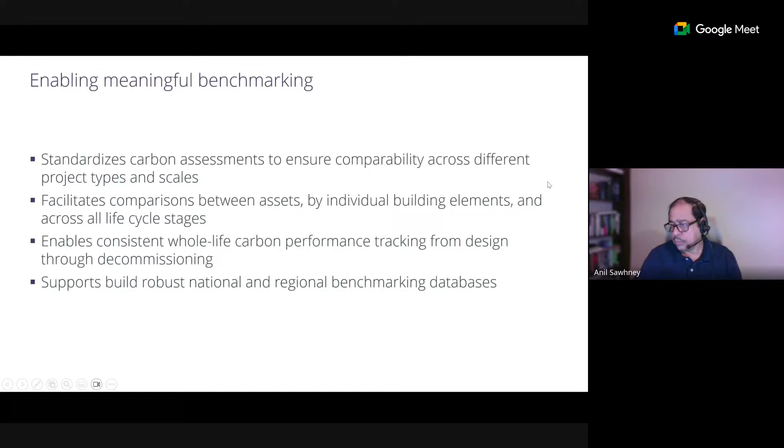So once you have your WLCA database in place, for example, you can utilize it to establish design baselines. So early in the process, you can guide your clients, you can guide the decision makers in seeing the kind of carbon emissions without having too much data or detailed design available for your project. So it helps promote iterative carbon assessment that informs each project phase from concept to delivery and up to end of life.

Supporting carbon targets and policies. So if you're using WLCA, it enables reliable carbon target setting across upfront, embodied, and operational carbon categories. So regulatory bodies, planning folks, and others, voluntary sustainability schemes, can use it to set those targets and implement those policies. So if you are in Vancouver, for example, they have set their own targets. If you're in Toronto, there are targets set. In many other places in Europe also, targets are being set. If you're an office building, you're given a limit or a target for emissions from your projects and assets. Without doing WLCA, it is really not possible to undertake these kinds of targets, policies, and limits.

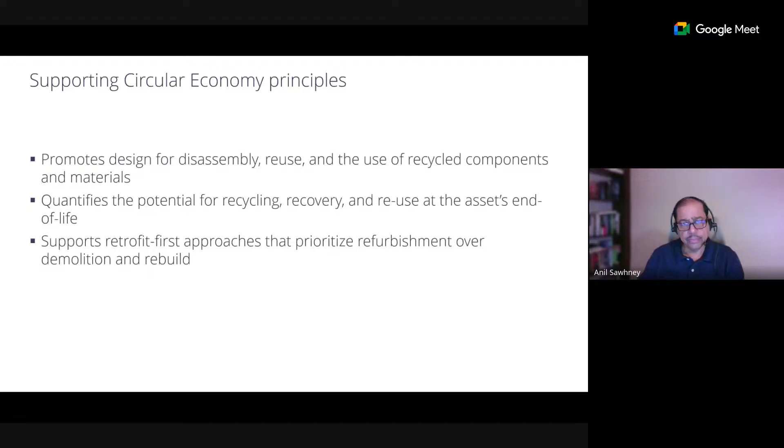So those are the benefits of using whole life carbon assessment. As I mentioned, through the use of WLCA, you can improve and enhance your emissions reporting across the GHG Protocol's 3 scopes. So the greenhouse gas (GHG) Protocol, you can go to their website and review all this, categorizes emissions into 3 scopes or categories. First is scope 1, which is the direct emissions from owned or controlled sources.

So assume you are the reporting entity. Let's say VNIT is submitting a GHG Protocol report on emissions. Any emissions that come directly from their owned or controlled sources are called scope 1. Scope 2 emissions are indirect emissions from purchased energy, purchased water for your assets. Scope 3 is all other indirect emissions from the value chain. And scope 3 is probably the most important, but the most difficult and complex to calculate, but it applies the most to the construction sector.

So these scopes help organizations identify, manage, and reduce emissions across their operations and supply chain. So if you're the reporting entity, it helps you do that. Most organizations and most requirements currently ask you to report scope 1 and scope 2. They realize that reporting scope 3 is difficult. So scope 3 emissions are generally not calculated and reported, but it should change. It will change if you're doing WLCAs, and I'll share with you perhaps tomorrow or the day after how, after doing a WLCA for your building, you can then categorize scope 1, scope 2, scope 3 emissions.

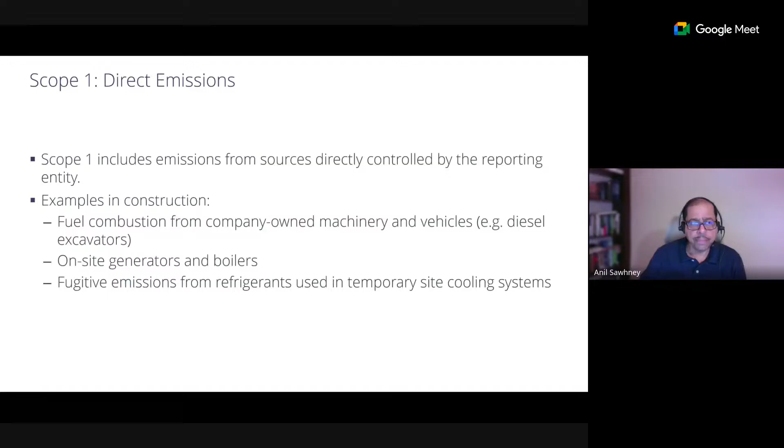Scope 2 indirect emissions are essentially emissions that come from purchased electricity, steam, heating, or cooling for your assets. So your company maybe buys energy from an external provider; the emissions related to that purchase are categorized as scope 2 indirect emissions. So if you are a construction company, for example, then all the electricity used in site offices and whatever else you have on site contributes to scope 2. So all emissions coming from temporary construction equipment are also scope 2 emissions.

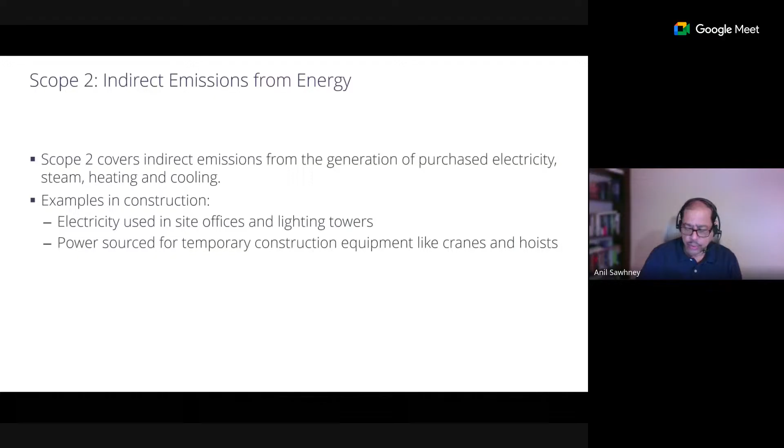Scope 3 are all other indirect emissions. So scope 3 is difficult to calculate because it's all other indirect emissions occurring in the value chain. Examples in construction would be embodied carbon in purchased materials like concrete, steel, timber, transportation of materials and workers to the site, waste disposal from construction sites, any business travel, any emissions from the use and maintenance of built assets related to your value chain all come under scope 3. So if you are looking at a construction project, a significant portion of the emissions that you calculate using WLCA would be categorized as scope 3 emissions.

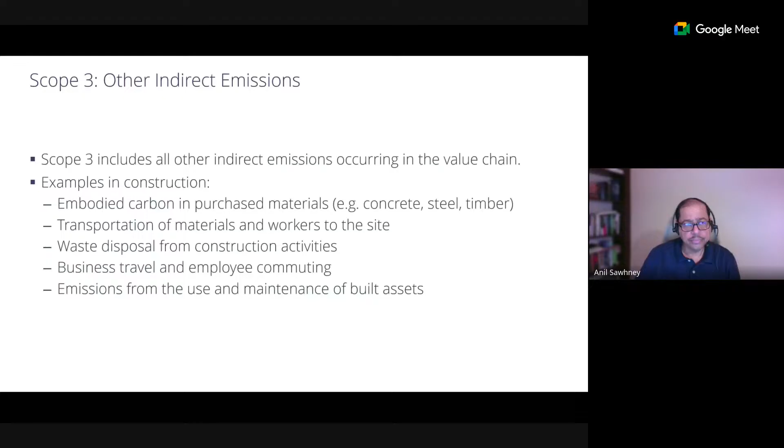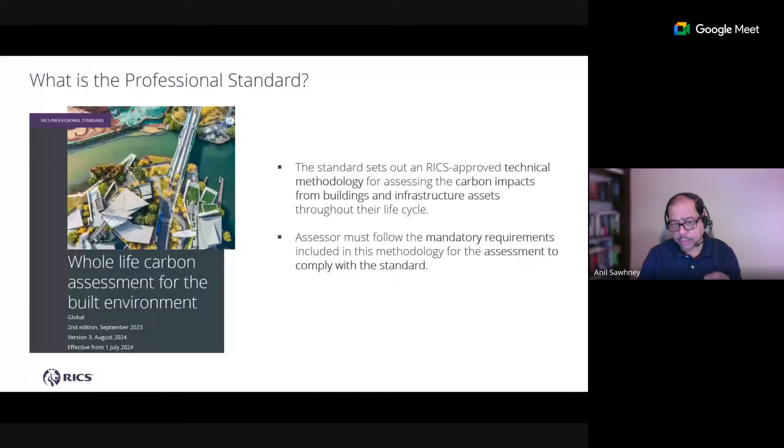So as I mentioned, 2017, we released the first edition of the standard. At that time, it was applicable only in the UK. It was regulated and used in the UK. But nevertheless, folks globally have been using our standard for a long time. Then about 3 years ago, a decision was made to release the second edition. You will notice the second edition has gone global. So from the first edition, which was UK based, it is now a globally applicable standard. It now includes methodology to calculate emissions from all types of projects: infrastructure projects, housing projects, small residential projects, to retrofits.

Okay, it is connected to another standard called ICMS, which we are going to discuss today, so that the standard can not only calculate carbon emissions, but it can also connect to cost, because most decisions about reducing carbon emissions should be made in a cost-effective fashion. So in order to do that, we need to connect cost and carbon together, and an assessor can calculate not only the carbon emissions, but is also able to calculate the cost associated with that design.

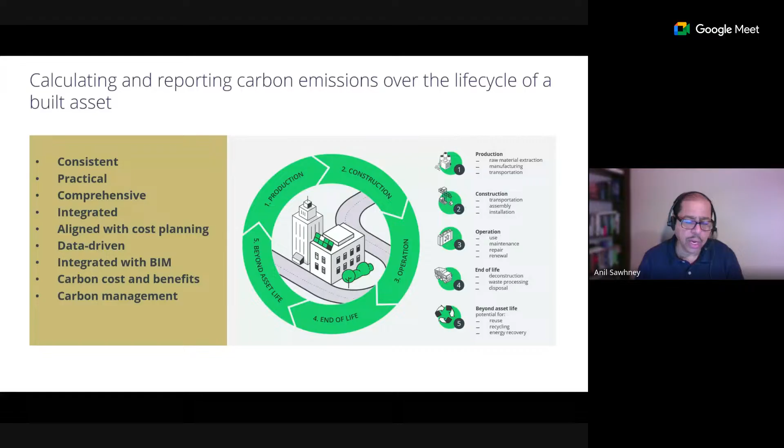It's aligned with cost planning, and that's done through ICMS, which I will try to explain as well today. So the methodology is data-driven. It's integrated with building information modeling, or BIM. It considers both carbon costs and benefits, and is also linked to carbon management.

So here are the key design principles. The WLCA standard that we have produced is consistent. So it is based on a methodology. It clearly tells you how to make assumptions and which data to use, at which life cycle stage, what data you should be using. So it's again a best practice guidance which is consistent.

It's practical. So unlike ISO and EN standards, which are basically high-level principles and mandatory requirements, our standard also provides best practice. It also provides heuristics or rules of thumb to make assumptions, to make calculations when you have limited data. It's comprehensive. We cover all modules, all system boundaries, product and project life cycles. The standard can easily connect to the core workflows of design, construction, post-construction workflows, and can work very well with regional and national benchmarks.

It's aligned to cost planning. So through the connection of this standard to this other standard called ICMS and to our own RICS standard called New Rules of Measurement or NRM, the assessments can be combined with cost planning also. It's data driven, so we guide you at every stage, every calculation, what kind of data source would work best for that stage. It's integrated with BIM, so you can use digital workflows for your calculations also. Carbon costs and benefits, this is very crucial.

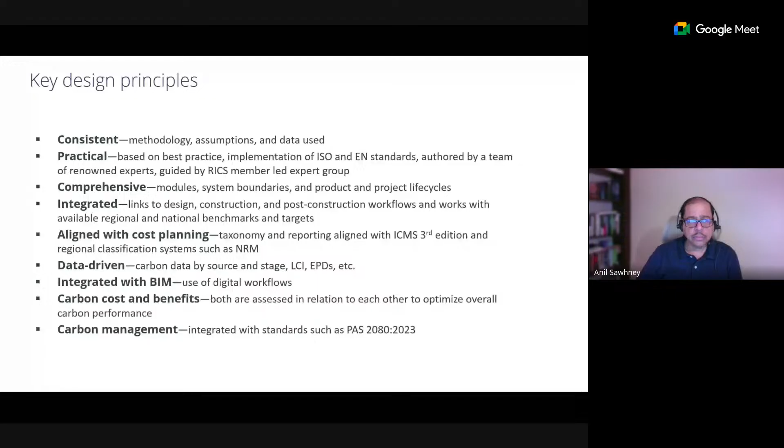You can also download the building element categories across which you need to report emissions. So it will be a simple table that shows you substructure, structure, services, and so on. So that elemental breakdown of categories is also available. So lots and lots of resources are available for free, which you can download and use.

So since its launch, about 30,000 downloads of our standard, which is a pretty big number. And then lots of other awards and finalists. So we have won the Engineering Matters Award in 2024. And we were also finalist in some other awards for this standard. So it's a well recognized, quite heavily used standard that our members are required to use.

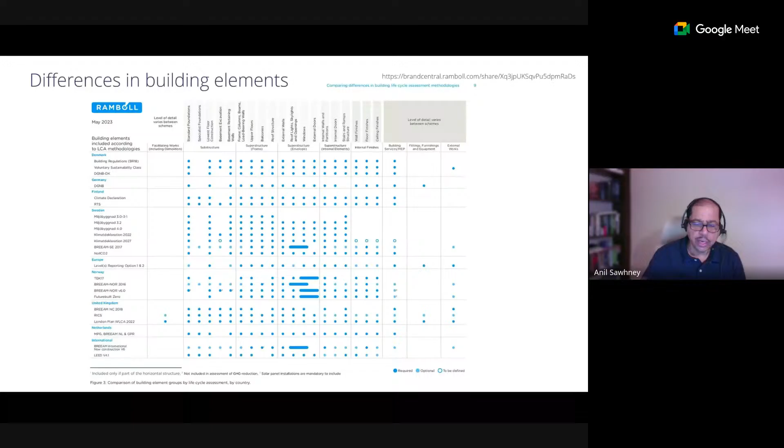There's another big debate actually going on right now. This report from Ramboll is May 2023. Our standard's second edition was released September 2023, so it doesn't fully address our second edition. Another finding from this Ramboll report was that, fine, we've done an excellent job calculating the total carbon emissions from our building.

In order to report, we need to say tons of carbon dioxide equivalent per square meter of your building. But the way the denominator is calculated can vary. As you know, in India, we have super area, carpet area, and so on. So that definition itself is problematic and reduces the consistency that we are looking for in doing whole life carbon assessments, putting them into a benchmarking database and utilizing them for various purposes, not only showcasing the better performing assets, but also utilizing that historical information to guide your new buildings in the early stages when not much project information is available. So it's another problem that must be addressed.

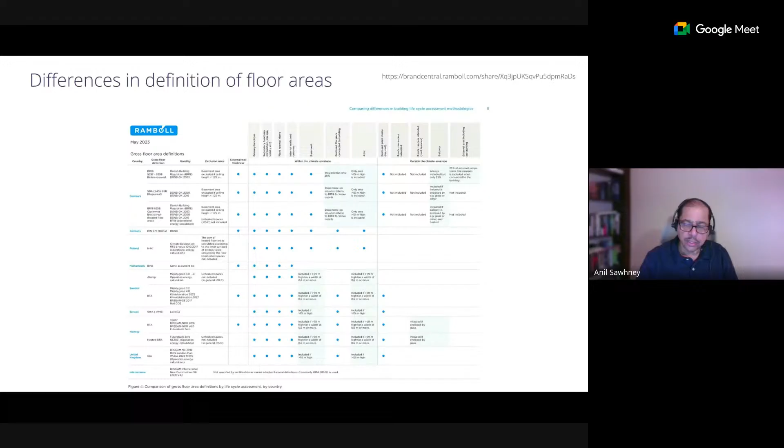So Ramboll did a study. They took a building in Sweden and in Denmark. They did the WLCA calculations, only certain portions. In Sweden, you can see that because we don't include all modules, the benchmark we got was 166 kilograms of carbon dioxide per square meter compared to 423 for the same building in Denmark.

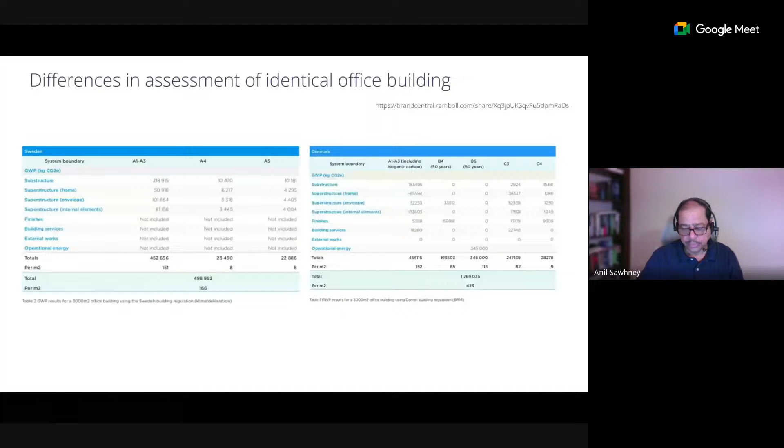So I'm going to pause here again and see if anyone has any questions. Anyone online? Anyone in the classroom? Okay.

Now let's dive deep into the actual calculation. I'm going to follow the RICS WLCA methodology, but I think you will see other standards have a very similar approach. The modular structure we are going to follow for computations is the expanded RICS modular structure, which is adapted primarily from EN 15978, in which we broadly have our upfront embodied carbon, in-use embodied carbon, and end-of-life embodied carbon.

We have upfront biogenic carbon, reported under Module B, Module C, and Module D. Obviously, we have operational carbon, B6 and B7, which is energy use and water use, and then your user carbon, which is here. So let's begin with Module A and how we go about calculating emissions under each module for either a building or an infrastructure project.

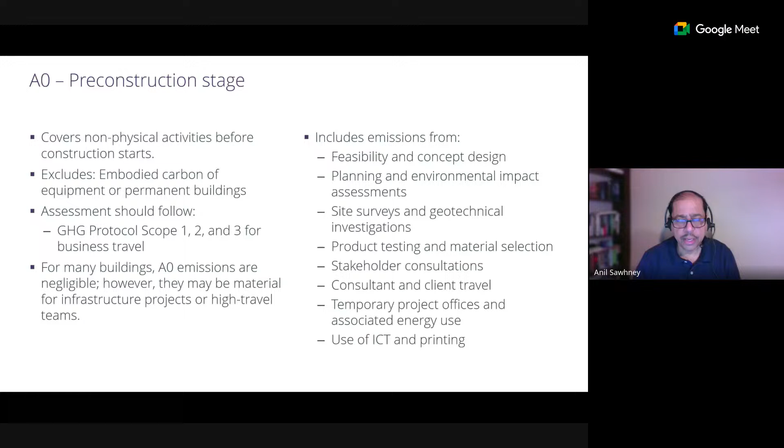Maybe you have soil investigation that requires heavy diesel-operated equipment, emissions from that, all your site meetings, team meetings, and all other aspects of emissions during the pre-construction acquisition stage. Generally for infrastructure projects, these are included in the A0 submodule of Module A.

The next calculation is done for A1, which is raw material supply. A1 applies to both buildings and infrastructure. Here you're calculating GHG emissions from the extraction and processing of raw materials used in a construction product, a construction system, and construction assembly. So it's very crucial that we consider these product stage raw material supply related emissions.

So it includes emissions from mining, harvesting, processing of raw or recycled material, and any emissions coming from transport within the extraction site, not leaving the extraction site. So let's say you're doing extraction or processing of aggregate. All movement within that aggregate plant or quarry will be included in A1. Energy and water used in raw material extraction is also part of this.

So it applies to all types of construction, all materials, all products, including MEP systems. And it's also for both primary and secondary material sources. So maybe you have recycled steel, doesn't matter. Whatever is used in the processing of that also is included under A1.

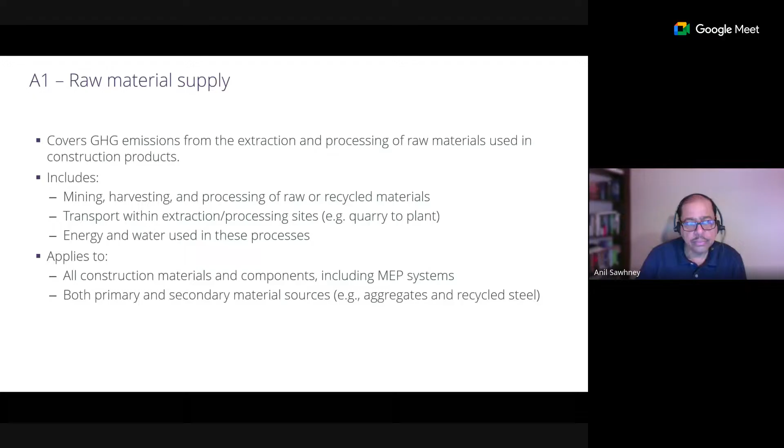So for A1 raw material supply emissions, imagine you're buying a cubic meter of concrete. You don't want to go and use first principles and calculate emissions coming from extraction of raw materials for your cement, then aggregate, sand, water, its mixing. If you started doing that from first principles, it would become very difficult to do assessments.

So we rely on published documents, which are called environmental product declarations, or EPDs. I'm sure all of you are familiar with this. The sector is relying on EPDs from which we read out our emissions. So there would generally be an EPD for cement, and then there may be an EPD for ready-mix concrete. You can use the appropriate material product and find out A1 from there, literally a monogram from where you can extract the carbon emission factor.

For material products where EPDs are not available, you may have to go down to first principles, do an LCA, and calculate emissions that way. You must avoid double counting with modules A2 and A3, because A2 is transport, but that transport is outside of the processing plant over to the manufacturing plant, whereas all transport related emissions within the extraction plant are included in A1.

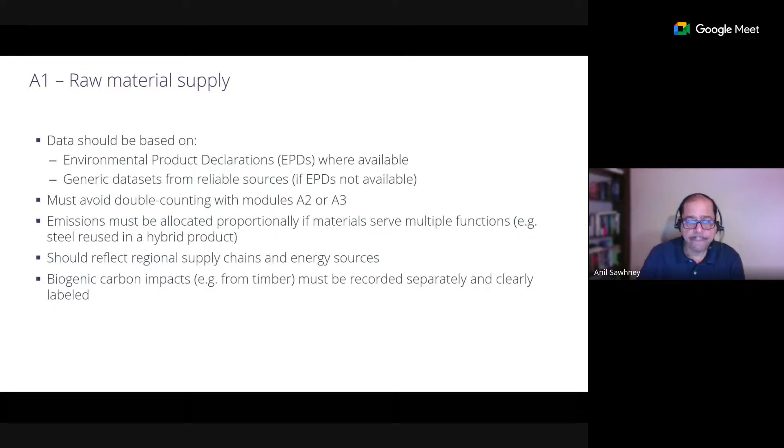The next sub-module within module A is for transport. This accounts for transport of raw materials and recycled materials to the product manufacturing facilities. So you've extracted some material that you need to use to create a construction product. The transport related emissions are all included in A2. This includes emissions from vehicles such as road, rail, sea, inland waterways, loading, unloading, and intermediate storage if needed.

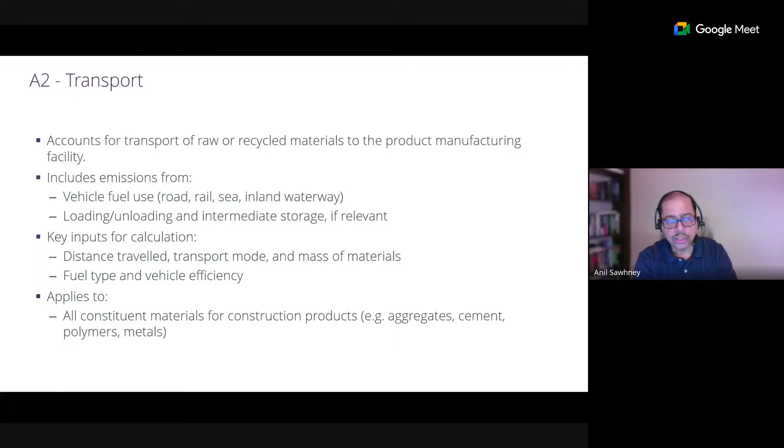Okay, so this A2 transport is sometimes also called internal transport or production related transport, versus another transport module we're going to see which relates to bringing these products, materials, components to the construction site. So more on that later, but A2 transport covers all your transportation related emissions from the extraction site over to your manufacturing plant.

So A2 transport assumptions should reflect actual supply chains or use reliable average data. It must be separated from A1. So A1 and A3 are separate; transport in between is calculated separately. If you're using multimodal transport, you need to account for each one separately. So if something comes by ship and then is transported by trucks, you need to account for those separately.

There are third-party databases. There is, as I shared yesterday, the Global Logistics Emissions Council, which releases carbon factors. So they'll tell you, and you use those to do your calculations. The UK government publishes GHG conversion factors. Most national statistics offices and government agencies are responsible for providing this kind of data, the carbon factors, which is also called secondary data or background data.

Remember, when you're doing an assessment, you will need two types of data. One directly related to your asset or project, meaning quantity of concrete, quantity of steel. This is called primary or foreground data. And then you need conversion factors, emission factors, EPDs. Those are called secondary or background data. So combining those two is how you calculate the emissions for your buildings. So A2 is related to transport.

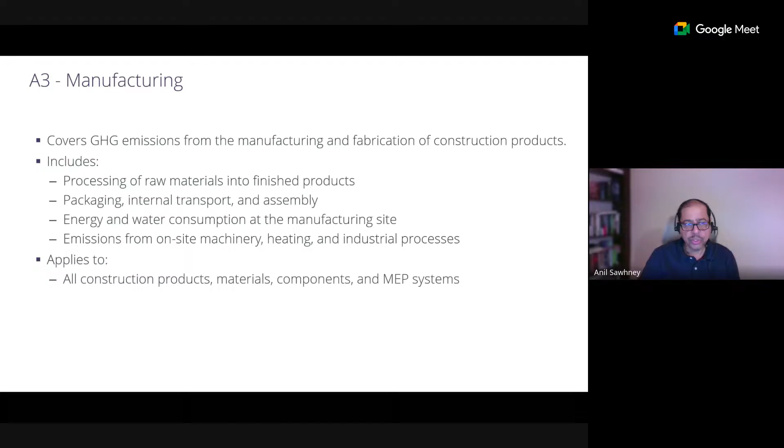So A3 manufacturing, generally, again, you're not going to go calculate fuel used, energy used, water used in the manufacturing plant to create the product that you're going to be using. Generally, we are going to rely on EPDs or environmental product declarations. So as you can see, EPDs are central to whole life carbon assessment.

We are going to spend time perhaps tomorrow separately talking about EPDs, their availability, their format, how to read them. I guess I'll give an example today also on how to read an EPD. Many of you would already be very familiar with it, but just to level set, we will look at that also today. So A3 is manufacturing, product stage done, pre-construction stage done.

Then we are now moving into the construction stage, where A4 transport emissions are basically all your emissions related to bringing stuff to the construction site. So it applies to new builds. It also applies to any maintenance repair work that you will do in module B. Okay, so A4 transport is now bringing construction products and materials from your manufacturing or storage facility to the construction site.

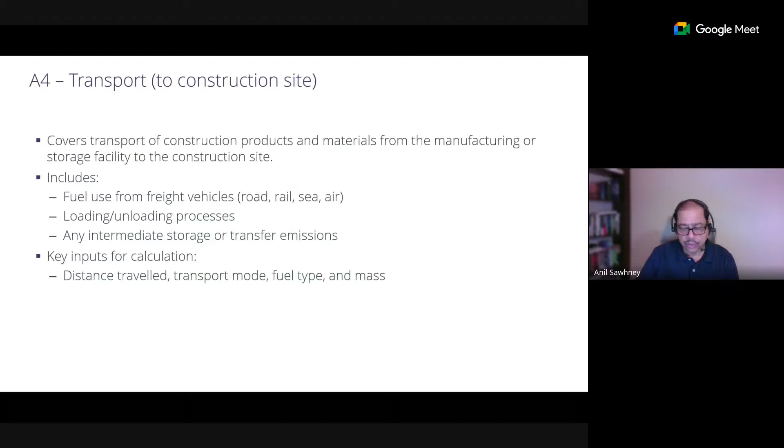Obviously, key inputs for calculations are distance traveled, mode of transport, is it a truck, the fuel type used, the tonnage or the mass of the material and the vehicle itself. So A4, transport to the construction site, again applies to all products, materials, temporary works, and MEP systems delivered to site.

You should use project-specific logistics data. So if ready-mix concrete trucks travel 17 kilometers to reach your site, you should use that in calculations. But as I said previously, we generally tend to make assumptions. We use EPDs that have built-in distance factors. So we don't go into very accurate calculations because remember, A4 is a tiny portion of the overall life cycle emissions that are going to come from our projects.

Emissions, make sure you do separate calculations for half laden, full laden, empty return trips. All that should be calculated. We'll see how that is done. But I think generally, again, you do not go into that much level of detail if it doesn't warrant it. So emissions from worker travel, though, are not included here. They are part of module A5 and scope 3, if relevant. Okay.

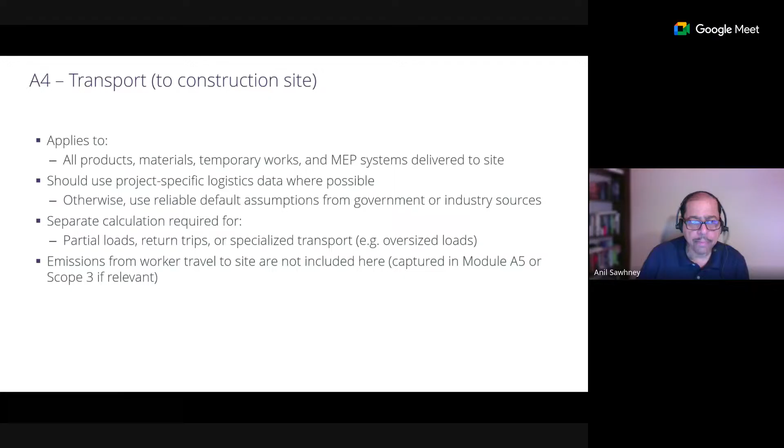So a quick example, this is adapted from the US. So I did a little bit of conversion. So you will see a bit of a problem in terms of units, but let's hope it all makes sense. So you're maybe working on a residential project in which you have a slab on grade with concrete, a particular grade of concrete. The total quantity needed based on the thickness of the slab comes out to about 56 cubic meters.

In the US, we have cubic yards, so converting truck capacity, let's assume each ready-mix truck, transit truck, will have 8 cubic meter capacity. So you need 7 trips to bring this ready-mix concrete to site. Let's assume, again hypothetically, the concrete plant to construction site is 24 kilometers one way. The fuel consumption factor you can get from the vehicle's published data. So let's assume 1.3 is that fuel consumption factor.

Each trip is 2 times 24 kilometers, so about 37.85 liters of diesel is consumed in each trip. Since there are 7 trips, you have 260 liters. Now you need to go and find out, when that ready-mix truck is running, either for every kilometer it runs what are the emissions, or for every liter or gallon of diesel that's burned, what is that carbon factor. In the US, EPA publishes this. In the UK, the Statistics Office publishes this.

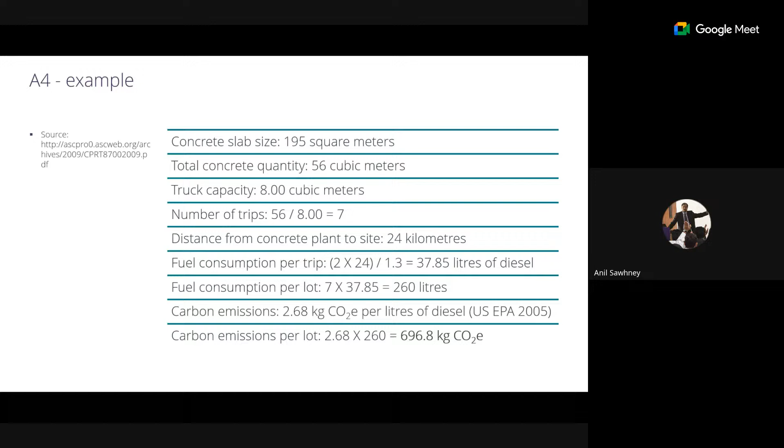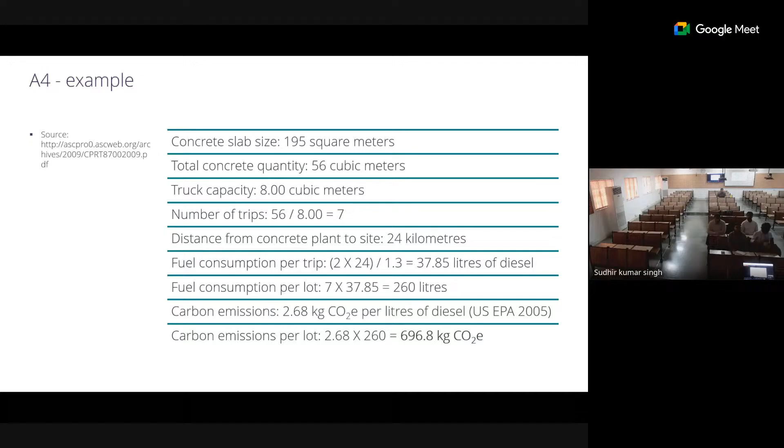Yes, sir. Okay, I guess we can start. Yes, sir. Okay, excellent. So welcome back. We're going to continue with this. There are a few slides more to cover before I jump into sessions 7 and 8, which are sort of combined, but there may be room for some questions and comments from you, as well as perhaps some additional examples.

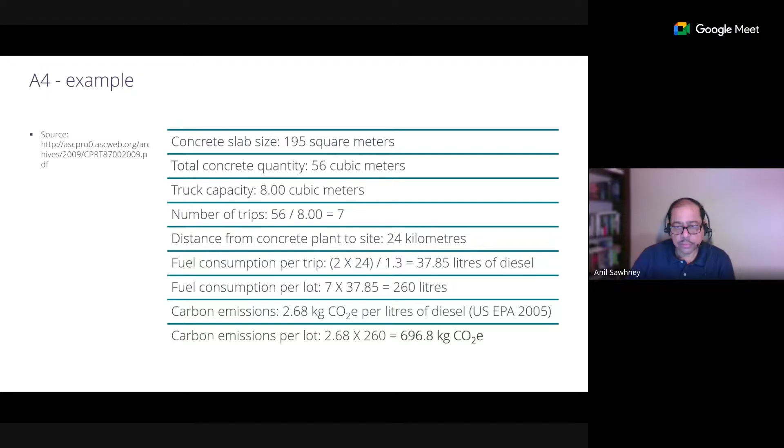So moving ahead after this example, the last module, perhaps the most important module even though it has a small contribution, is A5, the construction and installation process. The RICS standard breaks A5 into 4 separate submodules so that the calculations become easier and easy to understand. A5.1 is all emissions related to any demolition on the construction site. Any demolition or deconstruction of existing building structures or parts of them, including transport and waste processing, should go under A5.1.

A5.2 is construction activities, everything and anything to do with actual construction. So your concrete pumping, excavators, perhaps forklifts, or any other construction-related activities would be found under A5.2. Then you have A5.3, which is waste and waste management. Production, transportation, storage, end-of-life treatment, and disposal of any material waste on site is included under A5.3. So 5.1, 5.2, 5.3 should be calculated.

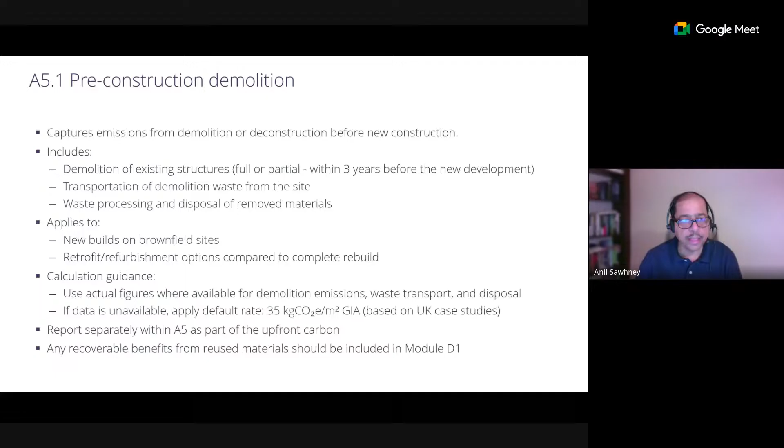A5.2 relates to construction activities, so it covers all on-site construction installation processes. It's all your site prep, site setup, mobilization, groundwork, your temporary facilities or utilities, on-site storage, transportation, temporary works, assembly of products, materials, lifting of stuff, pouring of concrete, compacting. All those construction means and methods should be accounted for in A5.2. All energy and water use for site offices, heating, cooling, lighting should also be included in A5.2.

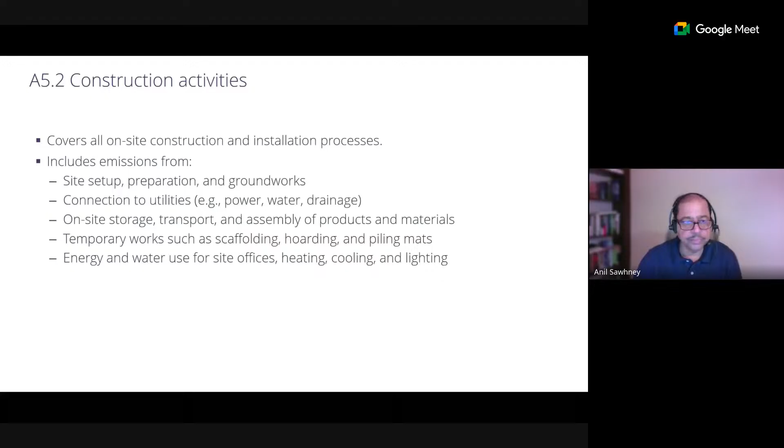So obviously, if you are going to go to a level of detail and doing these calculations, let's say you have scaffolding, or formwork, you have tower cranes, you are going to only utilize emissions from those temporary equipments that are used for your project, because there's going to be reuse also. So make sure that that is accounted for.

Once again, if you don't want to calculate from these first principles, every construction means and method, because there is so much data available on assessments in the UK, rule of thumb says you can add 40 kilograms of carbon dioxide equivalent per square meter of your gross internal area if this is a building, unless more accurate project data is available. So again, you can make these simpler calculations if you want to for your project or for your asset, for your assessment.

So encourage contractors to identify and mitigate 80% of anticipated site emissions before work begins. So for example, switching from diesel to electric or hydrogen powered equipment. And it's happening. So like in the US, contractors are trying to move away from diesel operated construction equipment, moving to electric perhaps, and therefore already reducing the site emissions.

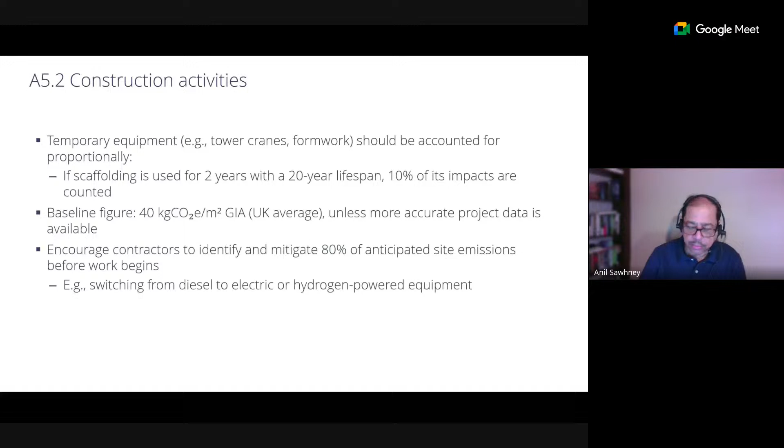So A5.3 is to do with waste and waste management. So it captures emissions from site-generated waste during the construction process. Remember, A5 is construction and installation process-related emission only. So any wasted construction material, which is actually a pretty bad thing, we shouldn't be wasting construction material. The material that came in didn't get installed, emissions related to that.

So that waste: transport of waste offsite, waste treatment, recycling or disposal, packaging waste, default 32% of site waste mass if no data is available. So again, you can utilize some thumb rules for packaging waste, for example. Key considerations: only include materials not installed in the asset. Construction and installation emissions for wasted items should be considered as zero because you just sort of brought them and moved them out of site.

Manufacturing waste from off-site construction. So let's say you're using modular construction, which is maybe factory-built components, maybe wall panels, your trusses, maybe bathroom pods. The waste that occurs in the factory should be part of A1, A2, A3. That is still considered the product stage, not the construction stage. So minor clarification there. So if your construction project is going to use extensively modern methods of construction, such as prefabricated panels, all manufacturing waste will go into A1, A2, A3, and not A5.3, this particular submodule within module A.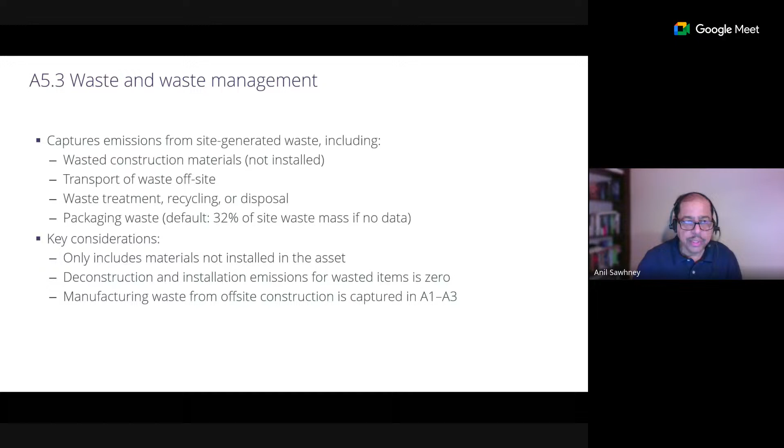So again, there are various ways of calculating this. Our standard tries to give you as much information as possible for waste and waste management related emissions. Broadly, A5.3 related emissions are calculated by a waste rate. I think most cost consultants, folks who know how to do quantity takeoff, would have these waste factors. So let's say ceiling plaster, interior wall plaster, when you pour concrete, when you do woodwork, there is always some percentage of wastage, and it's generally known to experts who work in this field.

And then A5.3 emissions are equal to the product of the waste rate multiplied by what's called the site waste treatment emission factor, or EF. So the RICS standard gives the waste rates. There's a whole table that, for example, says for in situ concrete, there will be 5% waste. For brickwork, assume 6% waste. This is obviously more UK-centric right now, but as we have more and more data, these can be global or regional numbers also. So if you don't have site-specific data, use the tables. Otherwise, you can use site-specific data also.

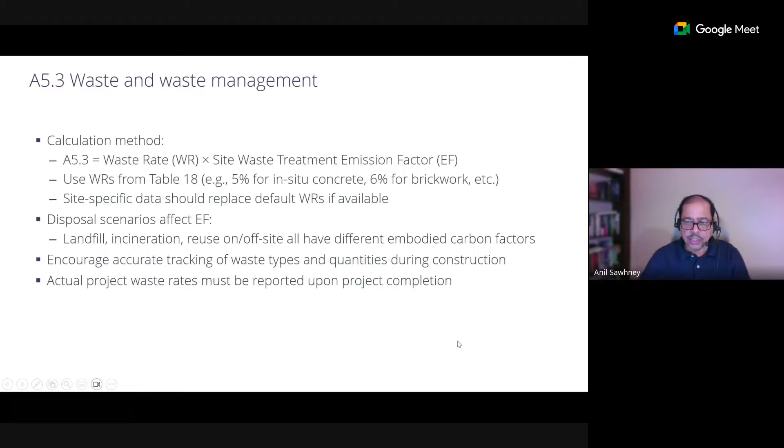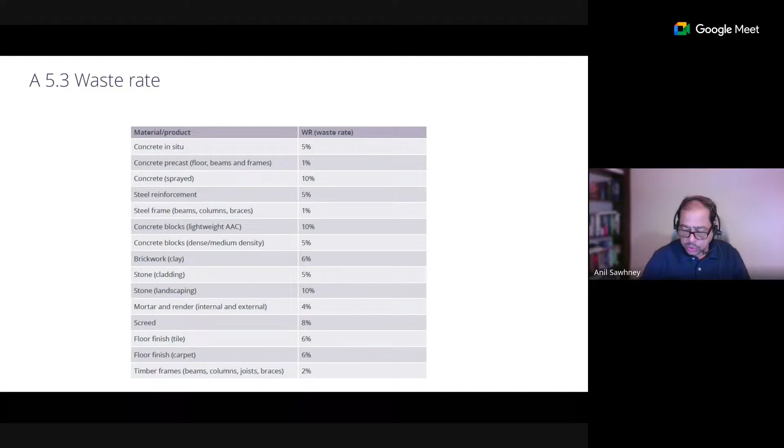So if you look at the standard, you will see WR provided. It's a much longer table. I've just given you a brief snapshot of what typically is considered as a waste rate for your project. And then once you have this information, you can do the EF, which is the site waste disposal carbon factor.

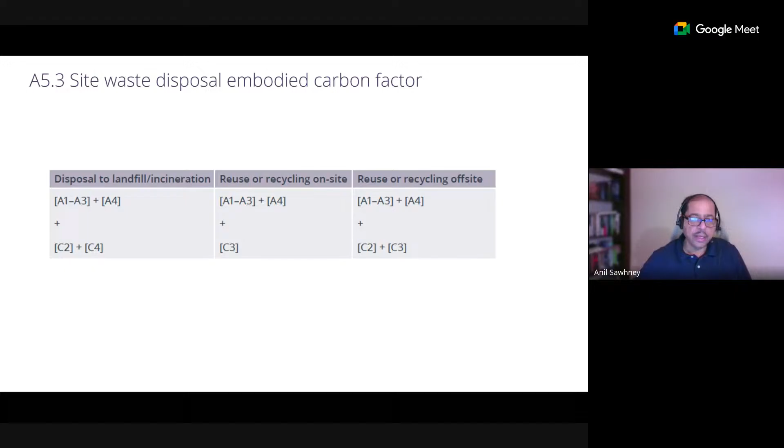If the waste that you have is going to go to disposal, let's say to a landfill, or is going to be burnt, then your waste factor is determined from A1, A2, A3, plus A4, and then the C module, which we have not yet discussed, C2 for transport, C4 for disposal into landfill. So depending on how you are going to be using the waste, the emission factor changes. If this is going to be reused or recycled on site, obviously then there is no transport. So you have A1 to A3, A4, and C3. If it's going to be reused or recycled on another project, you will have C2, which is end of life transport emission. So that's how this is structured, and you then calculate A5.3.

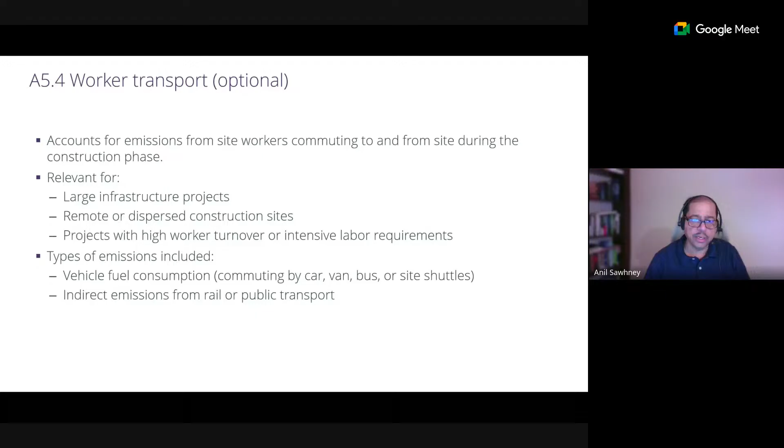A5.4 worker transport is generally optional, but let's say you have a huge infrastructure project in which workers have to commute a significant distance, especially if the contractor provides transportation, then you should calculate worker transport also. So it accounts for emissions from site workers commuting to and from site during the construction phase. It's relevant for large infrastructure projects, remote or dispersed construction sites, and those specific situations where you have emissions related specifically to construction worker transport. I haven't come across large projects where this is calculated and reported, so that's why it's considered optional.

Again, you can use approximations: daily commute rates, number of workers, multiplied by vehicle type. Most governments publish emissions per kilometer travelled for various vehicle types. So use those to come up with emission calculations for A5.4. So generally it is excluded, it's considered negligible, and it's optional if it's a building site in a city center. You do not provide transport for your workers. They may be commuting on their own, so that's omitted, not included.

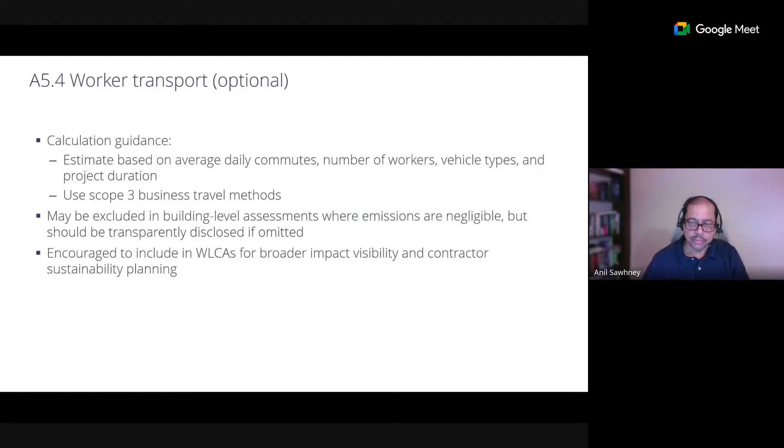So maybe before we jump, this basically concludes the calculation workflows and guidance, mandatory requirements from the RICS standard. You will see similar workflow calculations even in EN 15978 or any other global standards. The thumb rule numbers, like 35 kilograms carbon dioxide equivalent per square meter of GIA, may vary, but the steps, the calculation process, should remain the same.

Okay, so module A calculations are done this way. We're going to look at module B, C, and D separately in another session. But before we close this, I'm running a little bit behind, but I do want to look at this example. So you have a module A example in which you're using, let's say, again, a residential project with 50 cubic meters of M30 grade concrete in a slab.

Okay, you are the assessor. You have to do calculations for A1, A2, A3, A4. That is your product stage and the transport from the ready mix plant to the construction site. In this instance, because this product is ready mix concrete of a given grade, it's not too difficult to find the EPD.

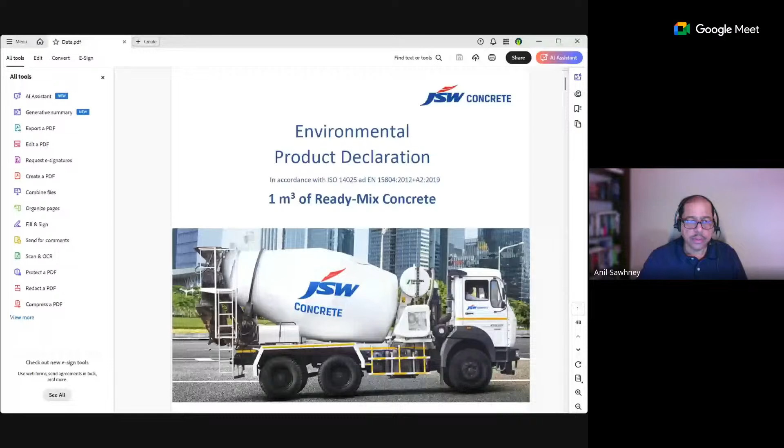Okay, so let me quickly stop sharing. Okay. Give me a minute while I load up the PDF. Just let me swap the screens and then we'll be ready to go. Okay. Sorry about that. Okay. Okay. Here we go. Let me know when you can see the PDF. Okay. Thank you, Dr. Nakwale.

So this is an example EPD. You may have seen it, you may have used it before. This is how an EPD looks in PDF format. We're going to discuss that in a session on data standards, carbon emissions data, tomorrow around this time, when we will be talking about the digital format of EPDs.

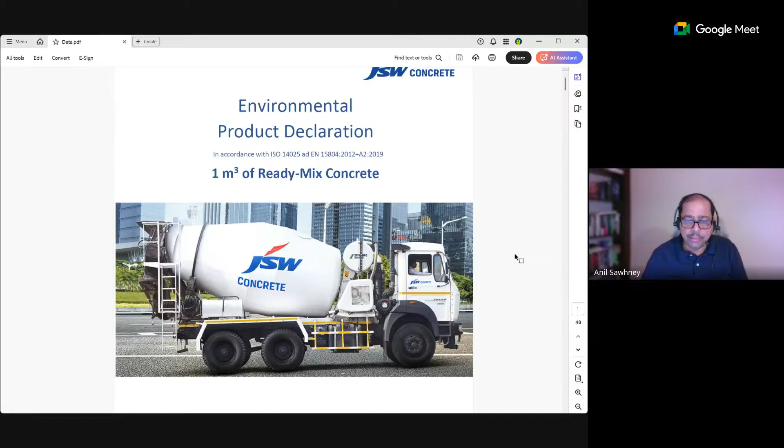PDFs are very flat. Even though you can use AI tools these days to automate the reading of an EPD, there are better formats called OpenEPD and others that can get you this information digitally. So I'm going to use this as an example to level set. Some of you are probably already experts, but I'm going to do a very basic example here. This is an EPD produced by JSW Concrete for ready-mix concrete. A few things to note, and I've tried to highlight those.

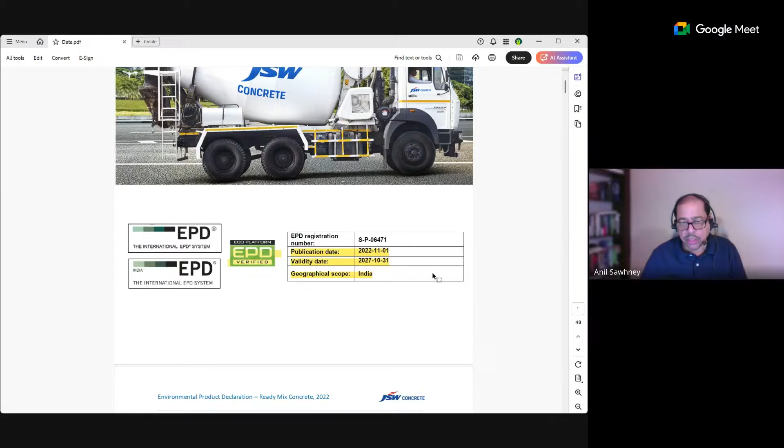You can see here that it is a verified EPD. It is still valid until 2027. You want to make sure that any EPD you use has a validity date beyond the project that you're working on. It's for India. Obviously, there's a lot of information. The software used to develop this EPD is GaBi, which I think we will be covering again tomorrow after lunch.

You will see this is for ready-mix concrete manufactured at these locations, but we are going to treat this as a regional EPD and use it for a project, let's say, in Nagpur also. Some more detail: you should see what ISO and EN standards they use for preparing this EPD. Very important to check what's called a PCR. A PCR is essentially product category rules.

So when developing an EPD, you need to have basic principles that tell you how to prepare the EPD. So that reference PCR is crucial. The product category rules used for this are for ready mix concrete, which is good.

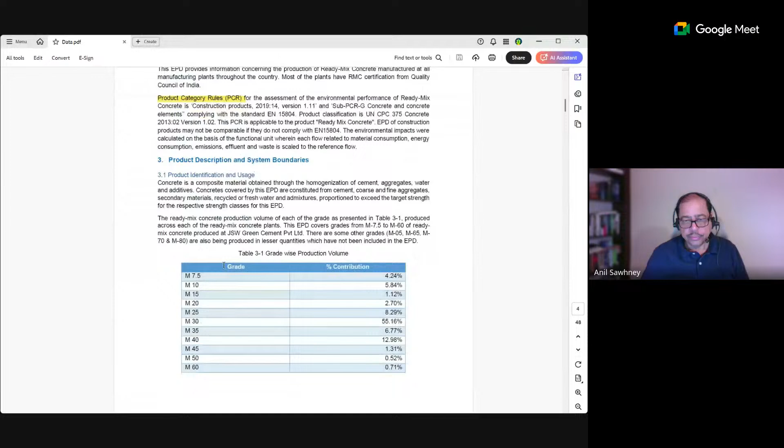And this particular EPD will cover M7.5 to M60 grade concrete. The EPD, very interestingly, I have seen EPDs that only give modules A1, A2, A3. But this EPD has A4 also. And obviously, very few current EPDs give C and D module emissions also.

For today's example, we are not looking at C and D. Maybe we'll look at those when we cover the workflow and calculations for module C and module D. Okay, but always important to find out what the system boundary and product stages are. So this is how they have laid out the system boundary. This is basically life cycle analysis done on the ready mix concrete when preparing the EPD.

So they are looking at all raw materials. They are looking at transport to factory, mixing concrete, end of life, module C. They also tell you the emissions that come from demolition and waste processing. So you have your end of life calculations also, but we'll consider them later. Very important to make sure that the declared unit is identified. In this case, all emission values in the EPD are going to be for 1 cubic meter of ready mix concrete of a particular grade.

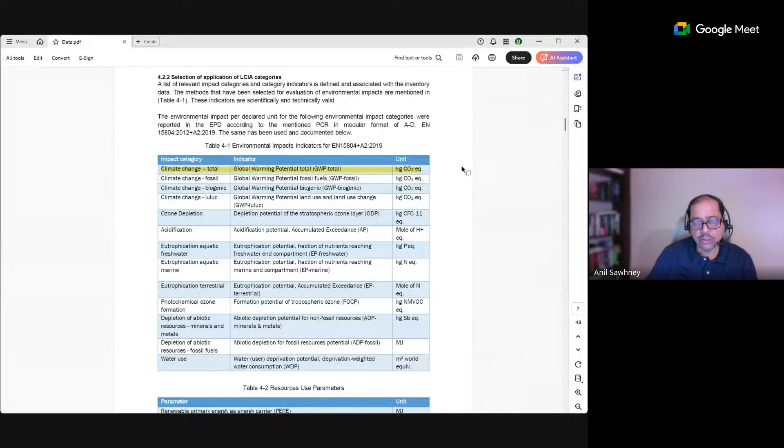And then, as per EN 15804+A2 2019 version, these are the environmental indicators that are included in this EPD. So they do give GWP total, GWP fossil, GWP biogenic, GWP land use change related, and so on. So many more indicators. For our assessments, we currently focus on GWP total. So this first row is what we are going to be interested in. So you can see more details. Obviously, you can take time to read these.

They have included upstream transport. Remember, during the product stage, any transport that takes place to the manufacturing plant, extraction, all of that is A2. But surprisingly, they give downstream transport also. But there's a little drawback, which is that they do not say what is the distance that they have assumed between the ready mix plant and site. They can use an average distance. They do mention 50 kilometers, but that's for the transportation of the waste, when you demolish that concrete and send it for maybe C&D waste. So it's unclear in this particular EPD what is the distance that they have used in calculating A4.

So they should technically tell you, like in the UK, I believe about 16.7 miles is the average distance assumed between a ready mix plant and a construction site. Yours may be 25 miles or 10 miles, but the data that they provide assumes that average transport distance. In this case, I couldn't find it, which is not a big deal, but they've used some average distance between the plant and a typical site.

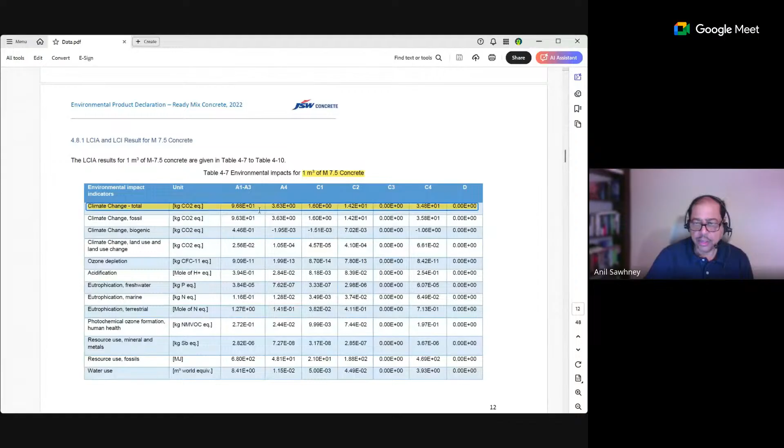So I think in our case, we are doing M30. So page, I believe 22. So you have 1 cubic meter of M30 grade concrete. Oops, not 22. It should be page 21. 1 cubic meter of M30 grade concrete. GWP A1 to A4 is highlighted here. So you can see the value of A1, A2, A3 emissions. You have 50 cubic meters, so you're going to multiply. Similarly, for A4, you have it for 1 cubic meter, you're going to multiply again. So that's how module A is generally calculated.

You search for an EPD. Obviously, the problem is going to be for locations where there is no EPD, locations for which certain products don't have EPDs, and there may be lots of other in-between cases. That's where the challenge of data comes in. But as the practice improves, more and more data gets collected, we would see that this issue can be overcome.

Okay, before I stop sharing, let me pause and see if anyone has any questions. Has anyone come across more ready-mix concrete EPDs? Which other manufacturers or concrete producers have EPDs in India? So if I were to search for an EPD for Delhi or Nagpur for ready-mix concrete, how easy or difficult would it be for me to find it? Anyone? Okay.

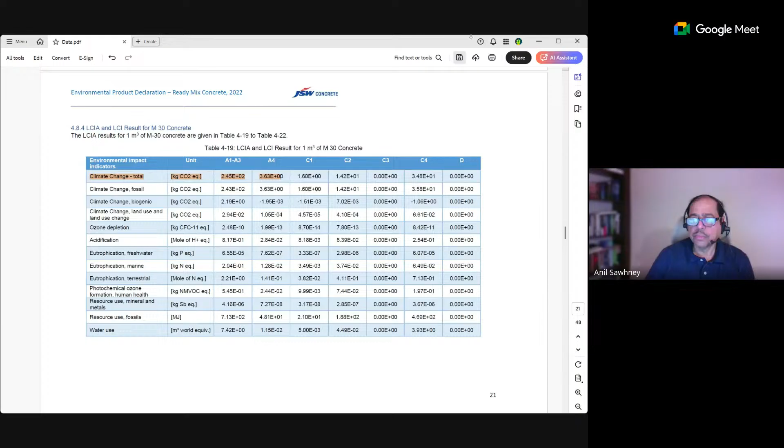I'm going to stop sharing. Okay, let me bring up my slides again. Okay, give me 1 minute. Okay, I think my slide should appear now.

So you will notice that we basically took the numbers from that table, which was, I believe, page 21: A1 to A3, 245 kilograms carbon dioxide equivalent per cubic meter. That was the declared unit. A4 is 3.63. You have 50 cubic meters. So basically that's your A1, A2, A3, A4 emissions from concrete on that particular project. So, very simple example, but it does highlight the importance of all the data that's needed.

So if you were doing a decent size office building, for example, one key thing that you would need is obviously the quantities. You also want to make sure that the quantities and the units match with the EPD that you're using. So maybe you have 50 cubic yards of concrete, but the EPD is for cubic meter of concrete. You need to make sure that the units match. The grade should be matching. Quantities, specification of materials, and the right EPDs would be required in order to do emission calculations, especially for embodied carbon upfront during construction.

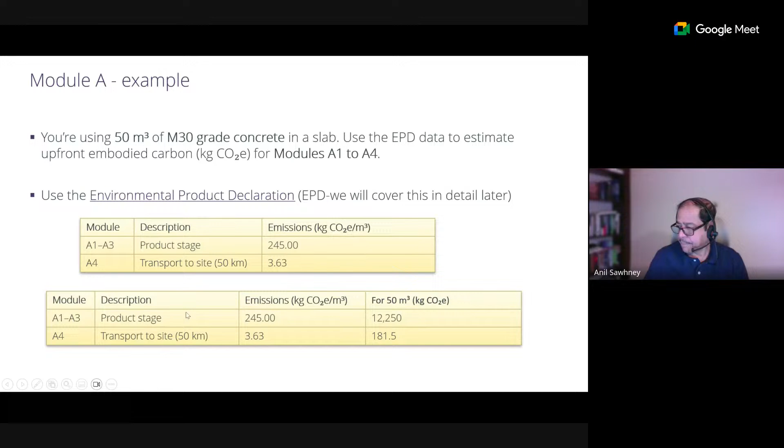Okay, so once again, I think this particular portion of today's topic is complete. I'm going to give you another chance to see if you have any questions. So Vaidik ma'am is asking, what should be the ideal frequency of recalculating EPD for the product? Could you repeat that? The sound is a bit low. What should be the ideal frequency of recalculating EPD for a product?

So EPDs are issued to a manufacturer. I think they are good for 3 to 5 years, but it will say when they were issued, until what period they are valid, and you should not be using expired EPDs. It may depend from product to product, but typically it will be 3 to 5 years. And more manufacturers are being encouraged to get EPDs. It's like the labels on the food that you buy. Let's say you buy a packaged food. In most countries now, you have to declare calories, sugar, salt. Same way you are declaring through these EPDs the GWP values for the product that you're selling.

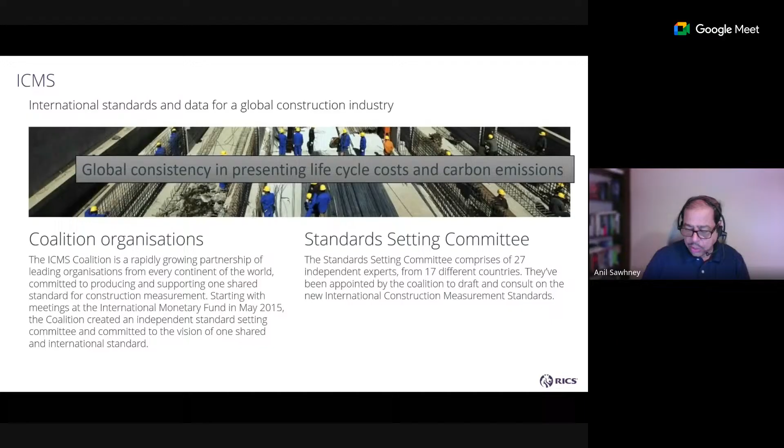So the ICMS is again a freely available standard that you can download from the ICMS website, which is provided below on the slide. We are going to be sharing with you all these slides in PDF, I believe, so you should be able to get this information.

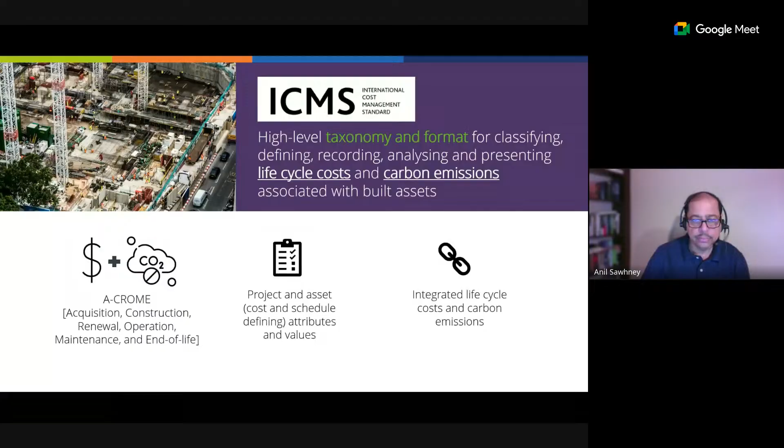So ICMS, as I told you, was first, we started working on it 10 years ago in 2015. The first edition was released, I believe, in 2017. And then the second edition was released in 2019. And then the third edition, which is the current edition, was released in November 2021. The first edition had only capital cost. So it was a classification system which all projects could use to report construction costs or capital costs.

Right after that, we realized there's no point. We need to provide life cycle costs. So acquisition, construction, renewal, operation, maintenance, end of life costs were released in the second edition. And then soon after that, in the third edition, we combined life cycle costs with life cycle carbon emissions so that both cost and carbon can be reported simultaneously.

So honestly, in the early stages of ICMS, when we were trying to get it adopted and implemented by construction companies and by many of the clients, including public sector clients, it was a difficult uphill battle because costs are generally confidential. They are not released openly, publicly.

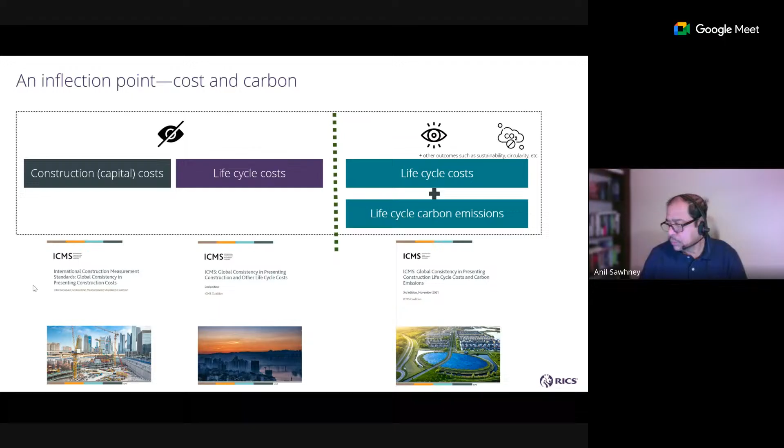Yeah. ICMS allows you to do life cycle cost and carbon emission reporting, but ICMS is only a reporting framework. It doesn't have any methodology in terms of WLCA. That is separate. But we have created templates for 19 types of entities within ICMS. So with the third edition, you can have all types of buildings, and you can also have 18 types of infrastructure assets that can be reported under ICMS.

So by combining WLCA and ICMS, we have opened up the possibility of calculating and reporting roadways and runways, railway networks, bridges, tunnels, water treatment plants, pipeline projects, wells and bores, power plants, chemical plants, refineries, dams and reservoirs, mines and quarries. And you can see from this list ports, waterways, and so on.

Whenever possible, we are adding more project asset types or entity types. So right now, work is going on for transmission projects. So those transmission projects will also be added. So you can see WLCA and ICMS together work not only for buildings, but also for infrastructure assets, which is really the crux and the core of this GIAN workshop.

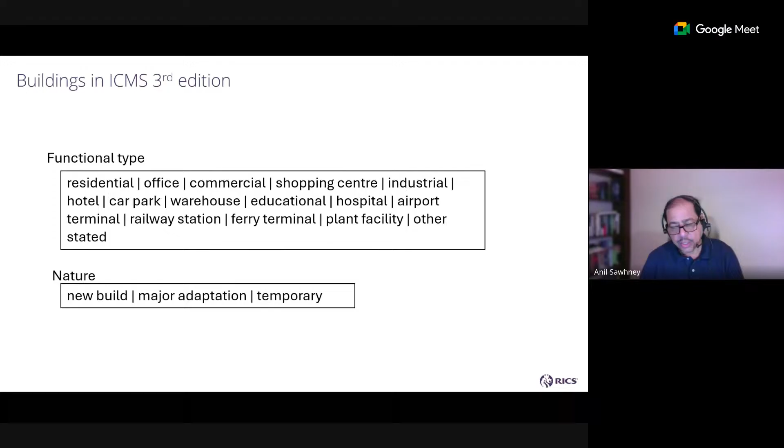You can also create projects and sub-projects. So you can have large or complex projects that can be subdivided for cost and carbon emission reporting into sub-projects and described by a single set of project attributes and values. You can also capture large portfolios and programs through this approach of sub-projects. So let's say you have a transportation network that can be your master project. Within that, you have station buildings, roads, rails, bridges, tunnels. They can be sub-projects. You can do life cycle cost and carbon emission reporting for each one of these sub-projects.

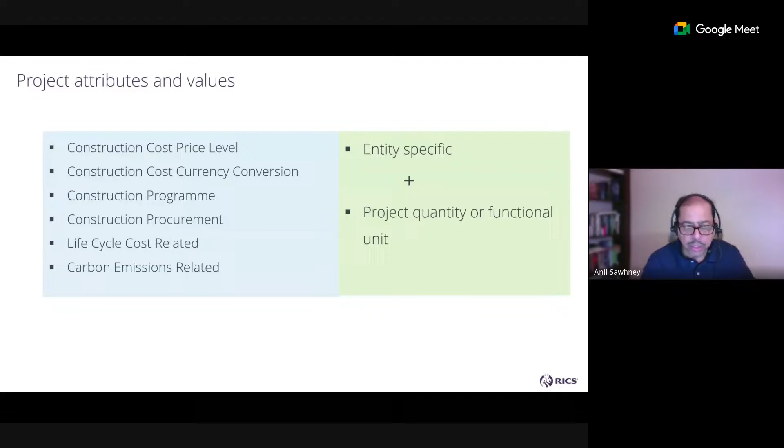So we have additional pieces of information that can be added to your cost and carbon information. These, as I explained earlier, are called project attributes and values. So you have construction, program, procurement, life cycle, and carbon emission related attributes. Why is this important? It's very useful for benchmarking purposes. So if you have a school building, its features, its characteristics, its attributes and values, if they're captured alongside the assessment of life cycle cost and life cycle emissions, you can then use it for benchmarking purposes. The taxonomy that's used in ICMS is pretty straightforward.

At level 1, you have your projects and sub-projects as I had just described. At this level, you are also declaring your project attributes and values. So I'm a construction company. I want to report using WLC and ICMS cost and carbon. I can provide my project. Sub-projects are optional. And then a whole list of general entity, project specific, life cycle specific, carbon emission specific attributes and

values. Below that is level 2, which is called the categories. They're common for cost and carbon, and that's the beauty, because as you report your categories, you're reporting both cost and carbon simultaneously. Level 3 is called groups, again, both for cost and carbon. Below that is level 4, which is your subgroups, and again, applies to cost and carbon. These are not mandatory. So the minimum requirement for WLCA and life cycle cost reporting under ICMS is level 1, level 2, and level 3.

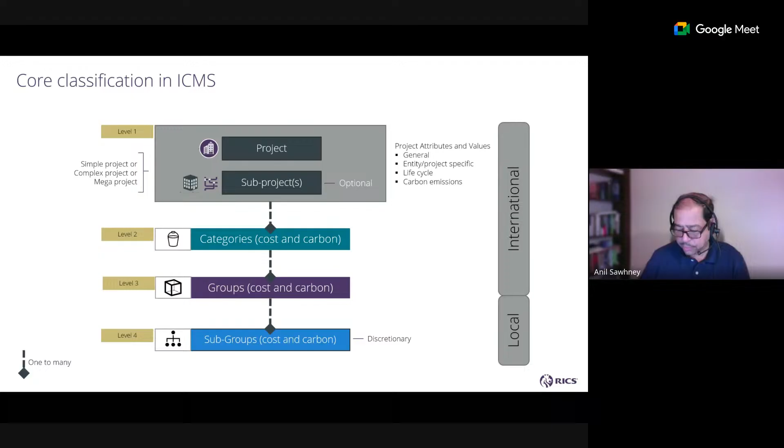This is how the taxonomy looks, and that's how it gets the name A-CROME across. So you have whole life cycle costs and carbon emissions. That is the goal of producing with ICMS so that we can have a consistent hierarchy. So you have your non-construction costs and carbon emissions. Remember, we had acquisition or pre-construction. That's sitting right here. Then you have your module A emissions and related costs. They come sit under C of CROME, which is construction costs and carbon emissions.

Then you have renewal costs and carbon emissions. That is the R in the A-CROME. This again connects back to WLCA as well as the cost. The goal here is to come up with a taxonomy which is integrated for both cost and carbon emissions. You have operation costs and carbon emissions. You have maintenance costs and carbon emissions. You have end of life costs and carbon emissions. So these are your categories.

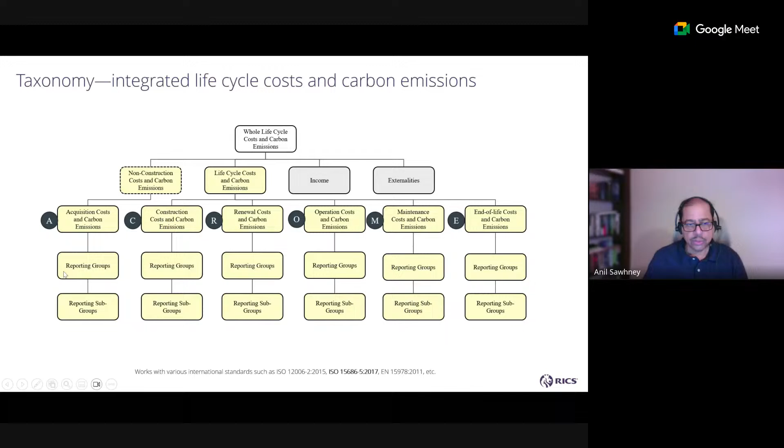Then you have construction costs CC and construction emissions CE. They use a single hierarchical breakdown. So these are your categories, A-CROME. The groups that are used underneath construction costs and carbon emissions actually are shared between renewal costs and carbon emissions and maintenance costs and carbon emissions. So these have demolition as 01. Remember, we just talked about demolition in module A.

You have substructure, structure, architectural works or non-structural works, your services and equipment, surface and underground drainage, external and ancillary works, and whatever is under preliminaries or your temporary works, those kinds of things are included here, and your general requirements. And you can see basically that's the hierarchy followed for C, R, and M.

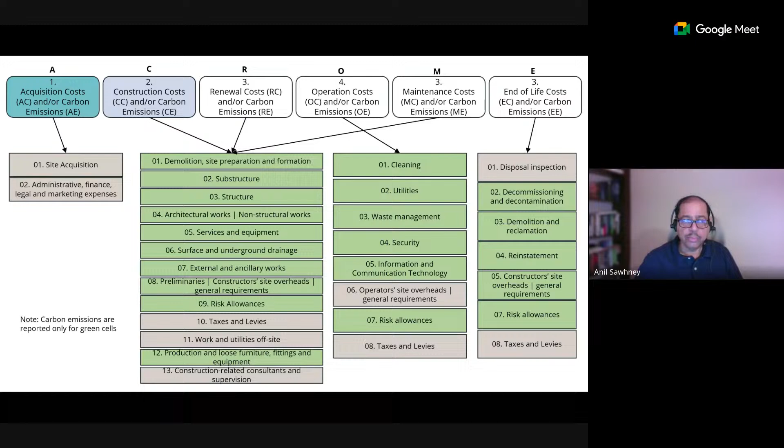If everyone follows it at a high level, obviously you can have much more detail below this, both for your cost and for your carbon. But as long as people fix level 1, level 2, level 3, we can start comparing, benchmarking, baselining our cost and carbon emissions. Okay, so the goal is to create this taxonomy and use it to not only integrate cost and carbon, but also bring some consistency in terms of inclusions and exclusions for maintaining your assessments for all the projects and programs that you may have. So in order to accomplish this, it was not an easy task because different parts of the world use different classification systems.

Think of the CPWD schedule of rates, or for those familiar with the UK system, think of it as Uniclass. If you're familiar with the North American system, think of it as MasterFormat or Uniformat, or any other system such as work packages or work breakdown structure. Different parts of the world treat their cost breakdown and carbon breakdown in any of these

categories. In the UK, you will have elemental classification systems, so you'll have your beams, columns, and so on. In the US, Canada, and other parts of the world, the classification is trade-based, so concreting trade, brickwork trade, and so on. It is not elemental. We have to make ICMS such that in any of these different types of classification systems, ICMS can be mapped.

So that if in India you're using maybe a trade-based classification, and in the UK the predominant one is an elemental classification system, for example using Uniclass, you are still able to, at the high level, maintain the same map. So that everyone reports, and you can have not only regional and national benchmarks, but global benchmarks also.

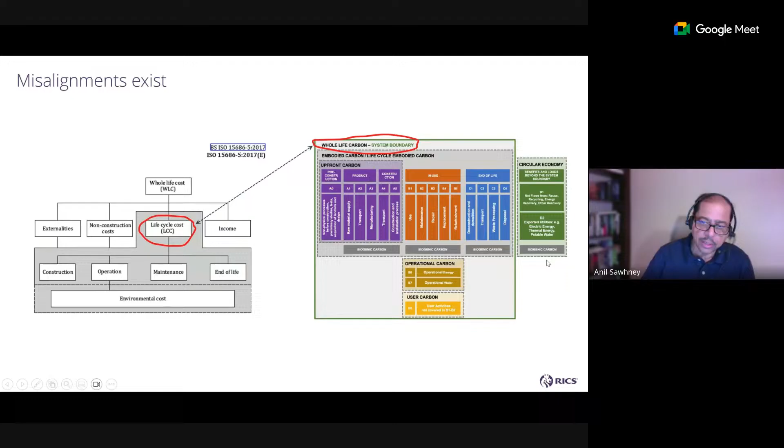The whole life cost includes externalities, non-construction costs, and income. Okay, so we are basically mapping life cycle costs with whole life carbon, because in whole life carbon taxonomy, module D is excluded. So basically, what has been done is for integrating ICMS and WLCA, this map has been created.

So you will see A0, which is the acquisition cost, which is optional in buildings, required for infrastructure projects, can map to either A1 or C2, the construction category of ICMS. Product stage, transport stage, construction process, all neatly map in the ICMS hierarchy to C. B4, B5 connect to renewal in the ICMS category architecture.

B1, B2, B6, B7, B8 connect to O of the ICMS, the operation. The B2, B3 connect to the M in ICMS, which is the maintenance. C1, C2, C3, C4 connect with the end of life category in the ICMS category list. And module D, benefits and loads beyond the system boundary, connect to externalities as shown here. Okay, so that is what's needed to bring ICMS and WLCA together.

Okay, so ICMS also provides a functional unit. Remember, we said for buildings, it's gross internal area, GIA, even though there are discrepancies on how we measure GIA. ICMS provides that kind of functional unit for measurement, or functional equivalent for benchmarking and measurement. So if you look at ICMS, this is how one of the reports looks.

We would generally have square meters of site area. So these are the length of the site boundary. These are the functional units that are provided in ICMS. So you can see that in terms of dollars per square meter of site area, but you can then also see kilograms carbon dioxide equivalent per square meter of site area. So everyone is now using the same functional equivalent, the same unit. So benchmarking, comparison, and baselining becomes much easier.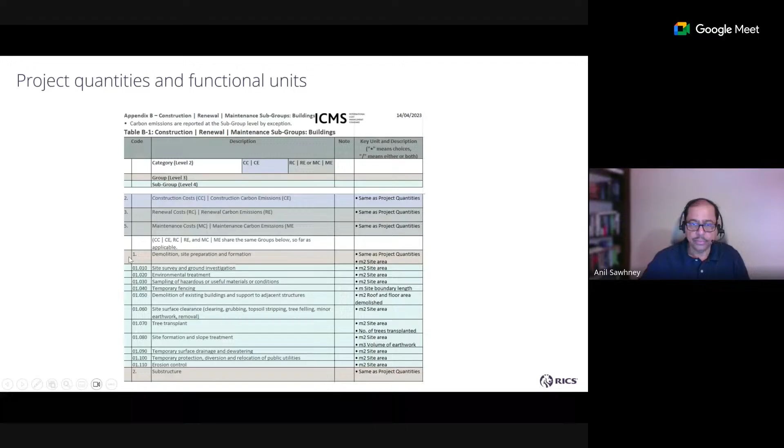So more work is needed. So the ICMS standard setting committee is right now working on figuring out what these additional functional units can be. So if we can go down up to the group level, we can come up with a uniform functional unit. Let's say at the substructure level, the structure, the services. So you can start reporting your cost and carbon across that functional unit.

Again, brings benchmarking below one level. So not only you can say for school buildings, there's a benchmark for cost and carbon, but you can also say at the structure, substructure, services level, there is a cost and carbon benchmark. So you can give better early advice to your clients or to your leadership team.

So this is one of the reporting formats. You can see ICMS breakdown used here. I don't know how readable this is, but you can see the demolition site, the all other substructure with level 2 here, level 4 ICMS code listed here, and then all modules A0, A1, A2, A3, A4, and so on reported by column.

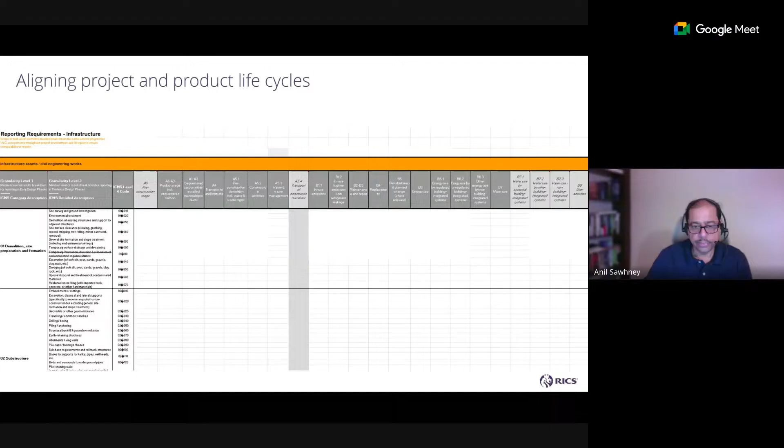So we are currently working on utilizing this approach of using ICMS as a high-level taxonomy, using the whole life carbon assessment professional standard and other classification systems. We are building this built environment carbon database, which has entity level benchmarks and product level benchmarks also.

So essentially, this built environment carbon database can have a whole number of projects, but it can also have EPDs for various products. I think some databases have like 200,000 EPDs. If you go to EC3, I think they have that many number of EPDs stored. So this kind of a benchmarking database for assets and products can go a long way in helping create a WLCA ecosystem for the region where you are operating.

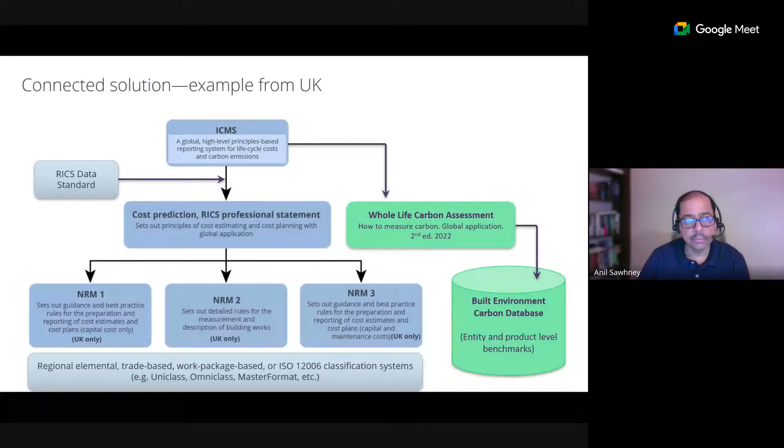Okay, so that takes care of that. I'm going to stop sharing. Okay, pause here. We have covered quite a bit of material. I'm going to take you into ICMS live into the document and show you some of these things. But before that, if anyone had any questions, comments, or suggestions, I'm more than happy to talk about that now.

No questions? I see Professor Aligaonkar off mute. No, he's still on mute, sorry. Anyone has any questions or comments? Sir, this is... Sir, am I audible? Yes, you are.

Sir, so yesterday also we saw some standards, methods. Today also. What is common in them is the approach for calculation of carbon emission, I think. And the actual method will change scenario to scenario. So if I am using for my own project two different methods or standards for calculating carbon emission, how can I compare it?

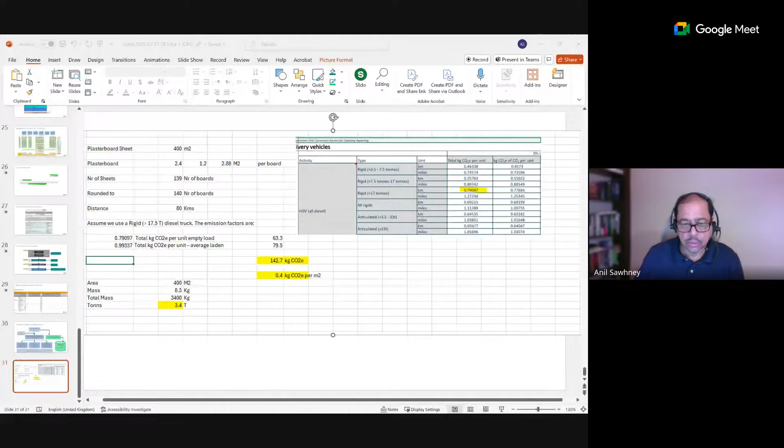So let me stop sharing. Go back to that. The next thing I want to do is show you another example of, okay, I have multiple screens, so give me a minute.

Okay, start sharing.

Now, I showed you from a database, you can actually calculate how many trucks you need, what's the distance you're going to travel, what's the emission per mile of a fully laden truck, and what's the emission in kilograms carbon dioxide equivalent for an empty truck. We used all those calculations, but you should not use those first principle approximations and search for that information if you have an EPD like this.

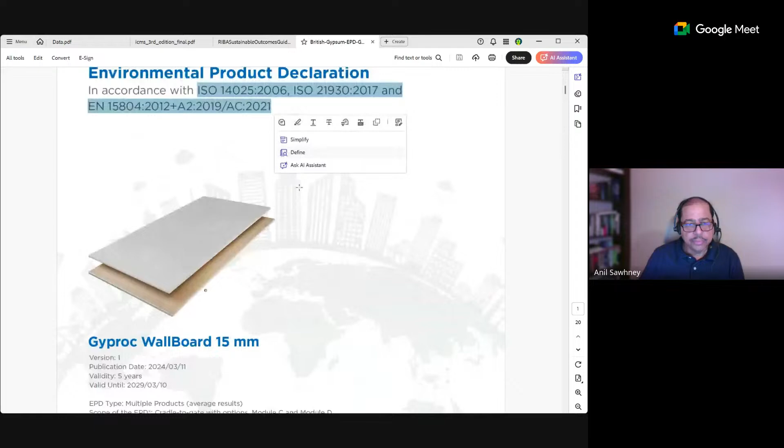Okay, so luckily for plasterboard or gypsum board or drywall, whatever you want to call it, Saint-Gobain or British Gypsum publishes an excellent EPD. This EPD also complies with all international standards. It is for a wall board that is 15 millimeters thick. It's called Gyproc. And we've got to search for a few things here. You know, the manufacturer. You should see that it is third-party verified. They are using a PCR. Once again, all that good information.

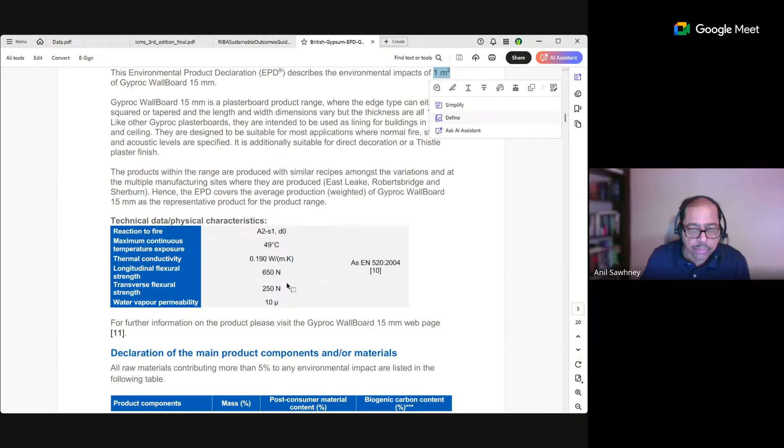You will see it's not saying it clearly here, but it's for 1 square meter of Gyproc, which is 15 millimeters thick. So this particular EPD is for that kind of information. So if you now scroll through, you will now clearly see the declared unit. This is a must for all our EPDs. This one has extensive information available, which is not very common right now.

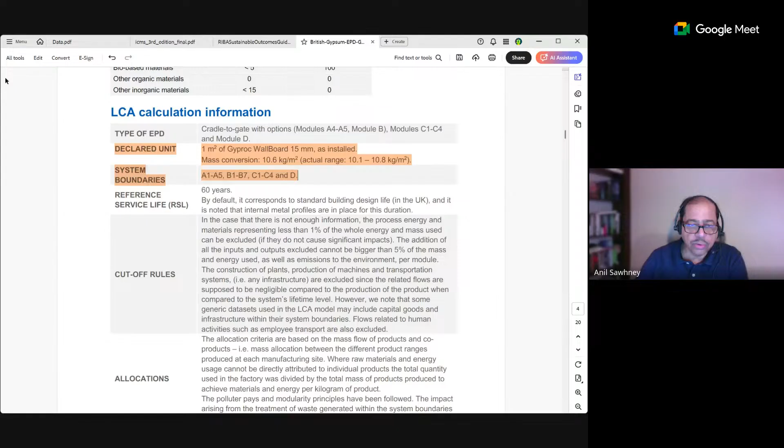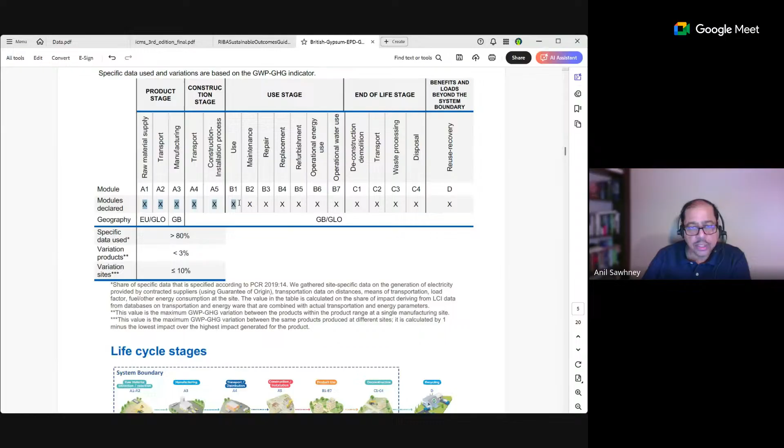So this EPD uses a 60-year service life, RSL of 60 years, and is able to give you A1, A2, A3, A4, A5, B1 through B7, C1 through C4, and D, which is amazing, not easily found. So I picked this example because of the wide range of availability. So you can see all modules listed here are declared in the EPD. And they describe the various stages. They describe the plasterboard manufacturing process, but now we are more interested in environmental indicators. For us, the total is what we are looking for, GWP.

So you will see the A1, A2, A3 value is given, the A4 transport value is given. Surprisingly, they have done a study in their EPD which tells you per square meter to install that sheetrock, let's say, into an interior wall surface is that number that you see on the screen for A5 installation. So you don't even need to do first principles calculations for your A5 emissions.

Since this Gyproc, this drywall gypsum board, during use doesn't have any emissions, right? It's not that you're going to repair it, you're going to replace it in a very systematic fashion. So B1 through B7 are all zeros. Then they have calculated C1, C2, C3, C4. Since it's Gyproc, there is no waste processing. You're going to demolish, deconstruct, transport, and then throw it in disposal. So you have zero. And there may be some benefit.

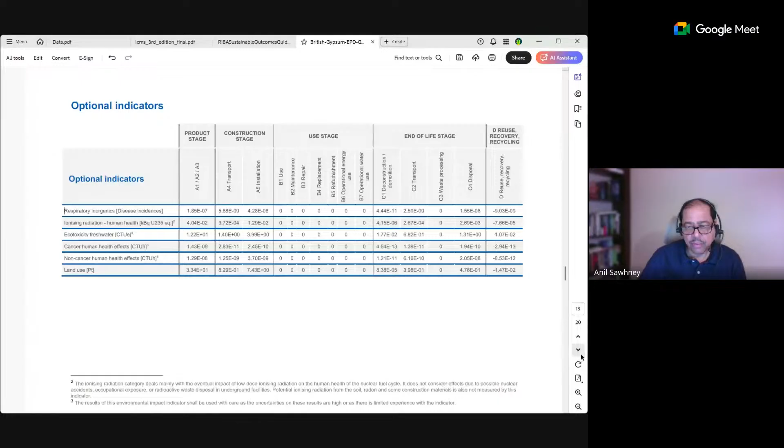In addition to environmental impacts, they also provide resource use impacts by life cycle stage. They have lots of other optional indicators. So slowly you will see that they actually provide health related indicators also, which is not very common. So this is a pretty advanced EPD available in the UK. Yeah, I think this we already covered. And if you want to understand a bit more, for 1 square meter Gyproc WallBoard, 15 mm, through their LCA calculations, this is how they are interpreting the results.

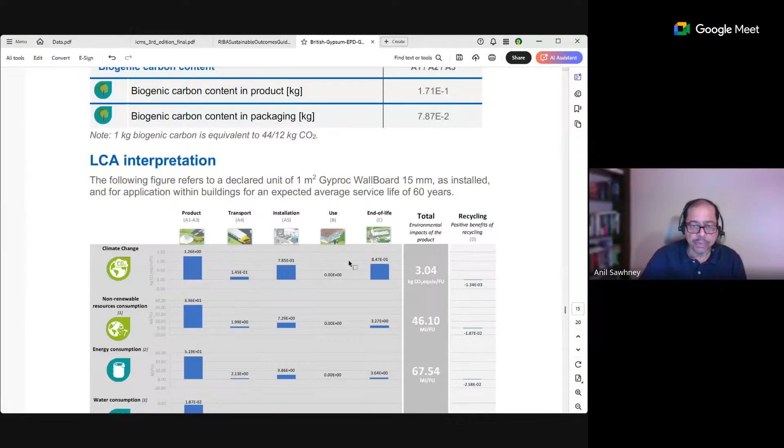So that's another example. We're going to go into more examples when we come back from our lunch break. So I'm going to stop sharing and open the screen once again for any questions or comments. Is anyone familiar with any availability of carbon factors by the Indian government?

Sir, I have a question. Yes. As you told, ICMS can be used as a database also. Correct. So can the database be used in SimaPro software? Because for my research work I'm using SimaPro. Okay. Can I add it in the processes and then use it for the whole building LCA? I think you're breaking up a little bit towards the end. So I think you said that SimaPro can utilize databases such as ICMS. So what was the question in the end? So for the Indian scenario, can I use the ICMS database in SimaPro? I can integrate them and use.

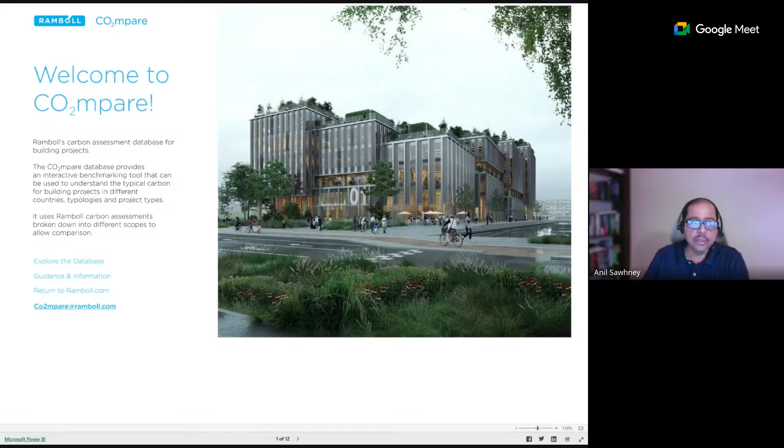So you will see that Ramboll is publicly sharing their project database. So you can, in this Power BI interface, select a country. Unfortunately, you can see how limited that is. You can select building types, so maybe residential, project type new build. And so they have 17 assessments available.

So you can go and see the kilograms of carbon dioxide equivalent, the spread in those 17 assessments. It's not a whole lot, but you can see, and they're only publishing A1 to A3. There's no other information published. So you can go, maybe look at Sweden. Maybe look for educational. Maybe look for new builds.

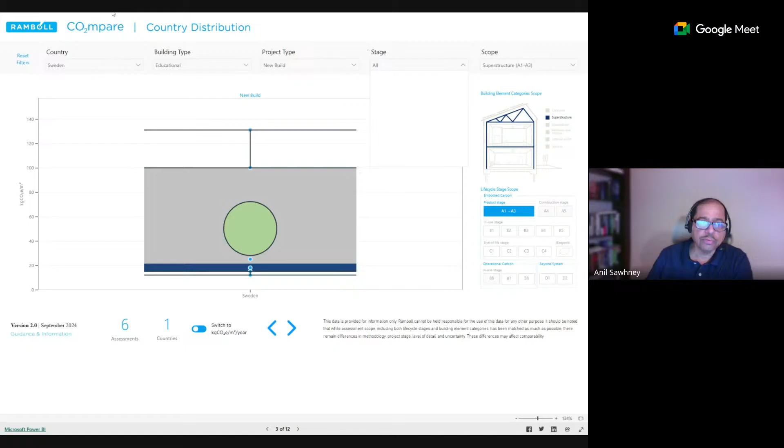And, come on. So there are only 6 assessments available. But that's what I mean by having a database that can help you maybe directly import information to other LCA software also. So I'm going to stop sharing, go and show you another database with a big data set.